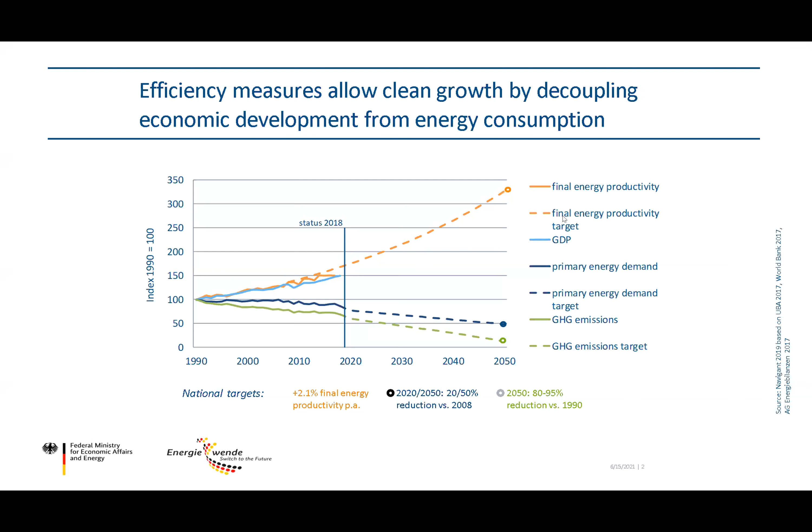I will just skip the next slide because it actually just shows what Germany plans with the energy transition, but I guess many of you already know the targets that Germany sets for the energy transition until 2050. So I would like to use this time to introduce you to the German Energy Solutions Initiative, which stands behind the project and is making this conference today possible, of course not without the help of our great partners, the German Chamber of Commerce in Peru, and our German partner eclareon here.

So a few words on the German Energy Solutions Initiative. Why are we doing all of this? We are facilitating business partnerships between German companies and companies abroad, based on a parliament decision that already dates back to 2002. For a very long time, we've been supporting small and medium-sized enterprises to distribute their smart and sustainable energy solutions. We also want to promote not only the German energy transition, but also climate protection. Everything is coordinated and financed by the German Federal Ministry for Economic Affairs and Energy.

On the next slide, I would like to show you what we offer for the Peruvian participants today. Of course, we offer information about German energy solutions, and we also offer the opportunity to get in contact with German companies through conferences like this one today, and the chance to network and expand the network. We also want to promote the know-how exchange, and we showcase flagship projects around the world through a couple of other events that we do.

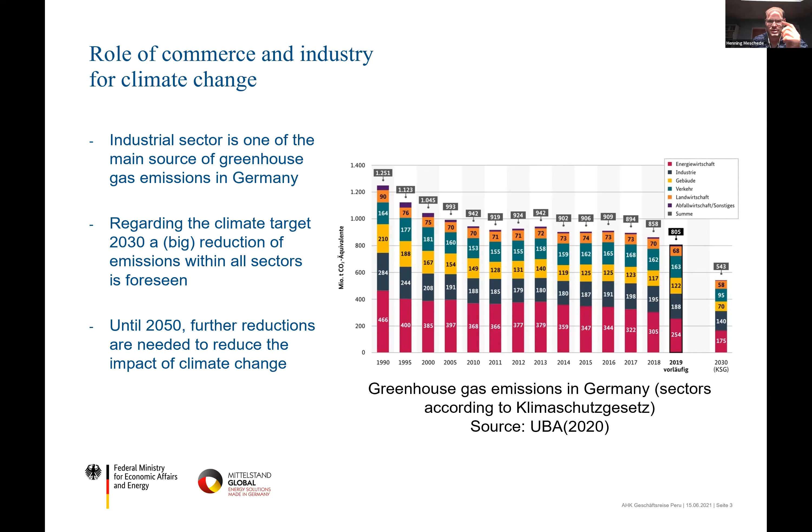Okay, I said we should think about the energy needs in our energy system. Here's what we see when we talk about industry. About 30% of our German end energy is used in the industry sector.

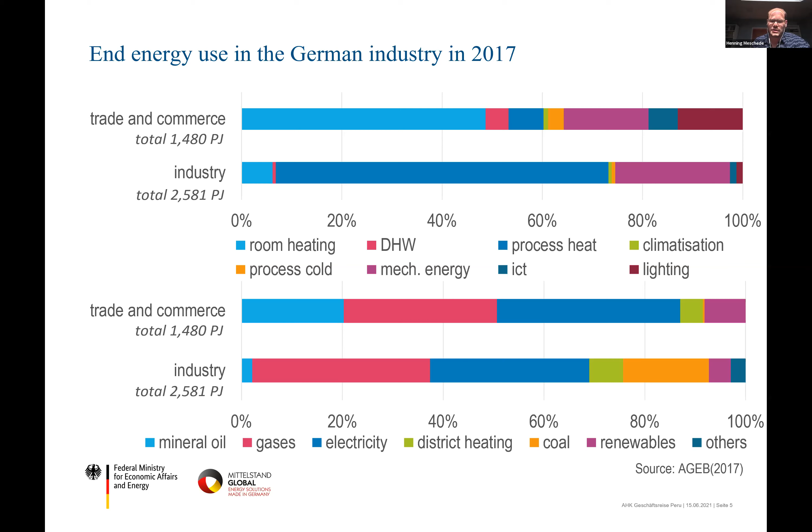On the bottom diagram, you see which energy carriers are used in the industry. We have a big amount of natural gas consumption, and of course a big amount of electricity. We also have some coal consumption, mainly due to the steel companies and steel processing industry. But here we see that we use fossil fuels, and we have to get rid of these fossil fuels and increase the share of renewable electricity and renewable energy.

We have these three fields to increase the energy efficiency and reduce our carbon emissions. First, what can we do on the energy needs side? We can think about our setting points or operation points, and consider if we can increase, for example, the temperature of the room to use less energy.

We can think about insulation, we can think about retrofitting. Then we have our technologies, in this case a chiller. Here we can think about efficient technologies like efficient pumps, efficient heaters, efficient chilling machines, and we can think about reuse of waste heat—what's won in our system that we can use more than once.

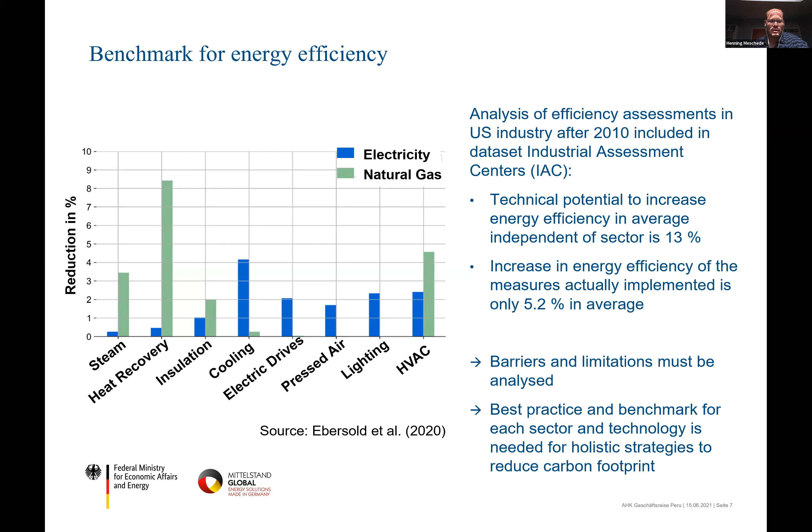Let's start with the HVAC system. Here we have a food processing factory. They produce some chocolate bars, and they have a hall where they have to satisfy or ensure a certain temperature within the whole hall of 18 degrees Celsius.

So 18 degrees Celsius for us humans is very cold, but for the product that was okay. And the idea was now to reduce the volume that has to be cooled down to 18 degrees so that we can reduce our energy demand for cooling our product.

You see here 3 options. The first is that we use some stratified air HVAC systems and only cool down the air at the ground or close to the product, and then we can use some in-housing. We have some encapsulation, you see that on the figure on the right. So we build an in-housing around the belt, and then we can reduce the volume that has to be cooled down to 18 degrees. Doing that allows us to save about 50% of the used energy within the system for the chocolate bar system.

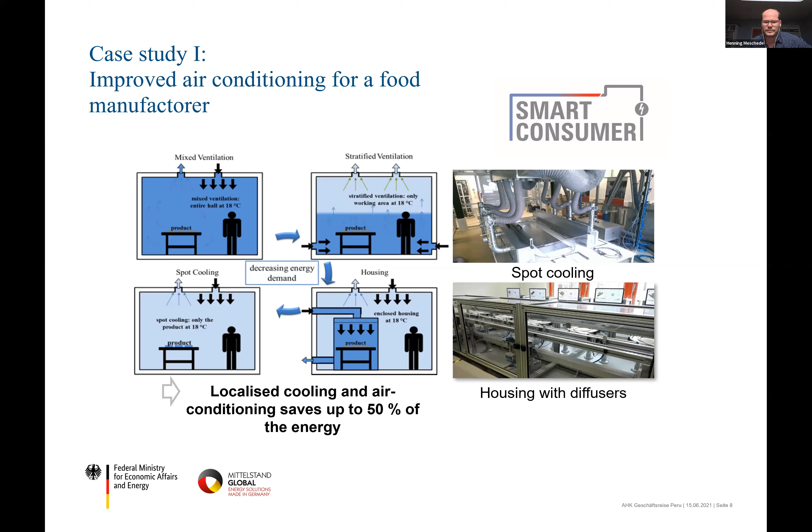Another possibility to increase the energy efficiency in the food processing industry and within the cooling of food was to optimize the operation of chilling machines. Here we have a factory, they produce sausage. They have to cool down their cold storage, and they have 2 chilling machines.

We analyze the chilling machines. We collect some data of the operation of the chilling machines, and then we use this collection and analysis of the data to implement a smarter control of the chilling machines.

Then in the third case study, I will tell you some options regarding waste heat utilization. Here we have a galvanic industry, so we are no longer in the food industry, but in the galvanic industry.

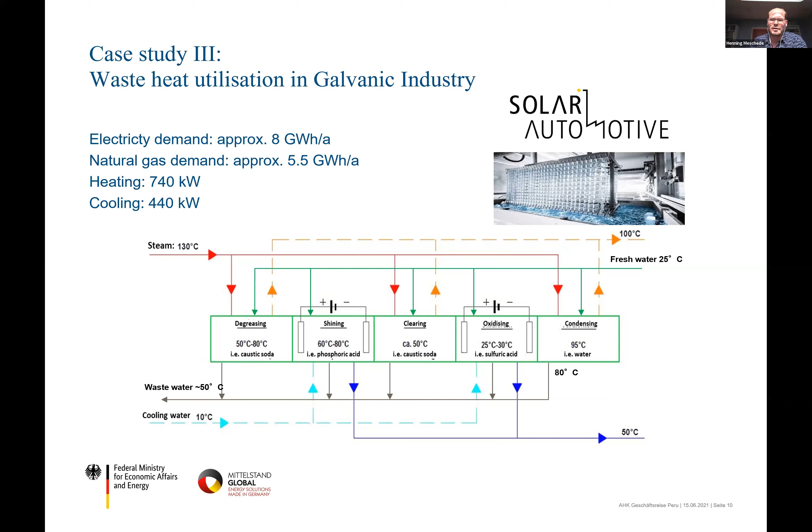But before we think about the energy supply, let's think about the waste heat utilization. We find some processes: we have wastewater with 50 degrees, we have the cooling water heated up to 50 degrees, and we have fresh water with 25 degrees. So we can use the heat that's in our wastewater and in our cooling water to preheat the fresh water and thereby save some energy for heating up our baths.

Then we have wastewater with a temperature of 80 degrees at the condensing bath, and we can use that too. So we can implement some ideas to reuse our waste heat and thereby reduce our heat demand. And that's what we have done.

We have to invest in a lot of heat exchangers, about 70,000 euros. But you see, we have a payback period of 1.8 years and a greenhouse gas saving of 186.5 tons CO2 equivalents per year, because now we can save about 712 megawatt hours of natural gas per year. That's what we have done with the waste heat utilization.

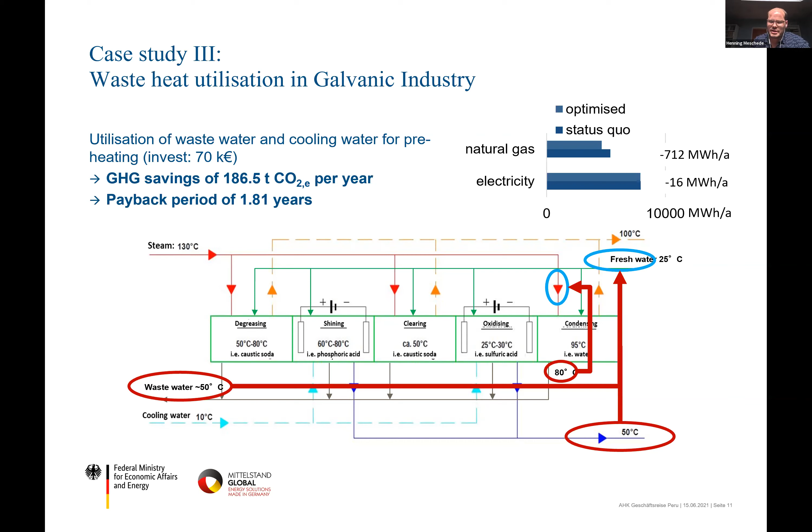And now, why start first with the waste heat utilization and then think about the energy supply? Here you see that in the status quo, before any waste heat utilization, we have a heating demand of 740 kilowatts and a cooling demand of 440 kilowatts.

Implementing this waste heat utilization, we can now reduce our heating and cooling load down to 400 kilowatts heating and 100 kilowatts cooling. That means every energy supply system can now be designed a little bit smaller.

Of course, we have some options for solar thermal process heating. We find payback periods between 7 and 8 years. But before thinking about the energy supply, we did this waste heat utilization to reduce the load.

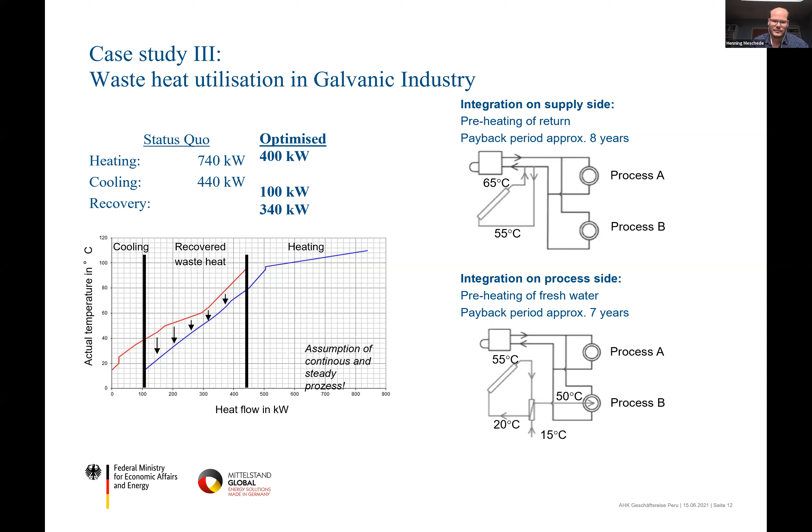Okay, let me summarize the idea. So what's a holistic smart energy system design? First, the design of any energy system starts with the analysis of the needs. We have to collect the data, analyze the data, and understand why we need energy. The industrial sector, as well as trade and commerce, have very high energy demand and cause a big part of greenhouse gas emissions.

In general, energy efficiency measures should start at reducing the energy needs, then reducing energy demand of processes and machines, and finally thinking about efficient ways of energy supply. Usually use this direction of implementation to design the best and most efficient energy system for your process and company.

And finally, of course, to design, evaluate, and operate energy concepts, data is indispensable. So we need collecting our energy demand. We need energy monitoring, and when we have that, we can do the best with the control strategies or with the design of any new energy system.

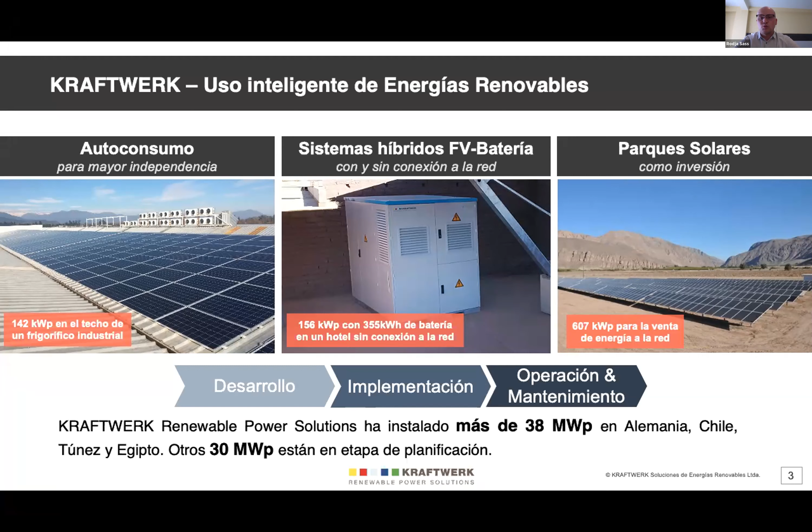En Perú, al día de hoy, no existe, en comparación tal vez con otros países como Alemania o también Chile, una legislación que permite la inyección de los excedentes de generación. Uno puede autogenerar la energía renovable en sus instalaciones, pero al día de hoy las inyecciones no están permitidas, y eso hace bastante importante un buen dimensionamiento del sistema fotovoltaico para evitar que hayan demasiadas pérdidas que no se aprovechan en el instante.

Siendo esto un tema importante al día de hoy en Perú, les quiero a continuación dar tal vez un simple ejemplo del comportamiento de una instalación fotovoltaica. En general esperamos que, como lo podemos ver a la derecha arriba, que un día no tan lejano exista esa posibilidad de inyectar y vender los excedentes de generación a la red, que ya está en trámite, pero todavía no sabemos cuándo exactamente se va a pasar esta ley.

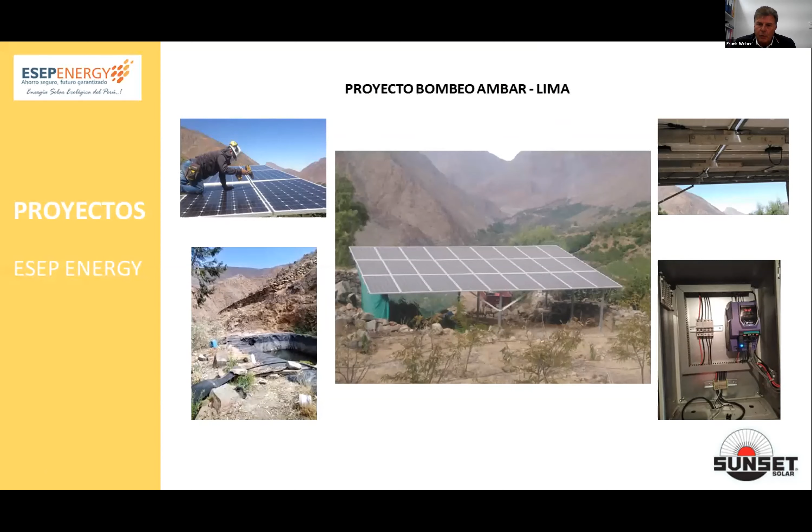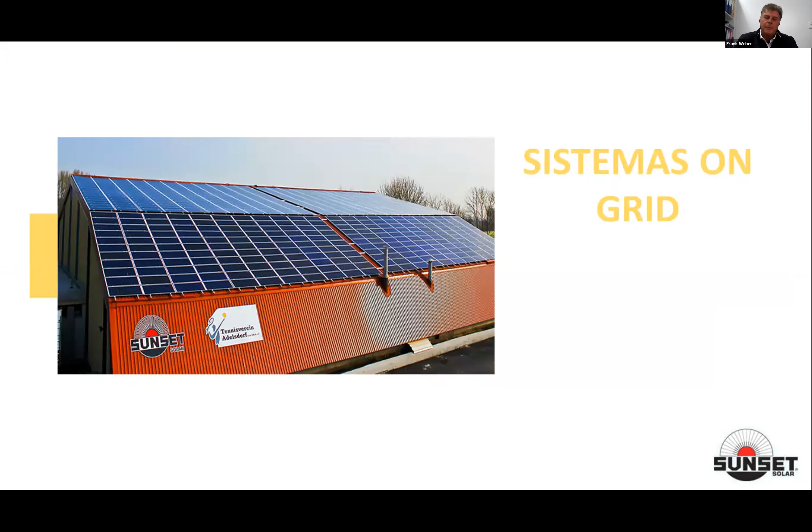El sistema on-grid, es decir, conectado a la red. Ya anteriormente el señor Sass ha explicado bastante bien este tema. Lamentablemente todavía no tenemos esta ley que nos permite inyectar a la red pública. Sin embargo, hay muchos clientes que tienen su consumo prácticamente durante el día solar, en este sentido.

Nuevamente se genera aquí la electricidad, se convierte en 230 voltios, 60 Hz en nuestro caso, y con un smart meter se puede evitar que el exceso se inyecte a la red. O también se puede acumular en baterías, esa es otra posibilidad.

Aquí unos ejemplos de instalaciones on-grid. Sunset instaló en el Senati, aquí en Lima, y en Arequipa, una instalación de 60 kilowatts de potencia. Esto es en parte financiado por Alemania también. Eso sirve para que los jóvenes que estudian en Senati estén ya en contacto con esta nueva tecnología y se puedan entrenar y aprender.

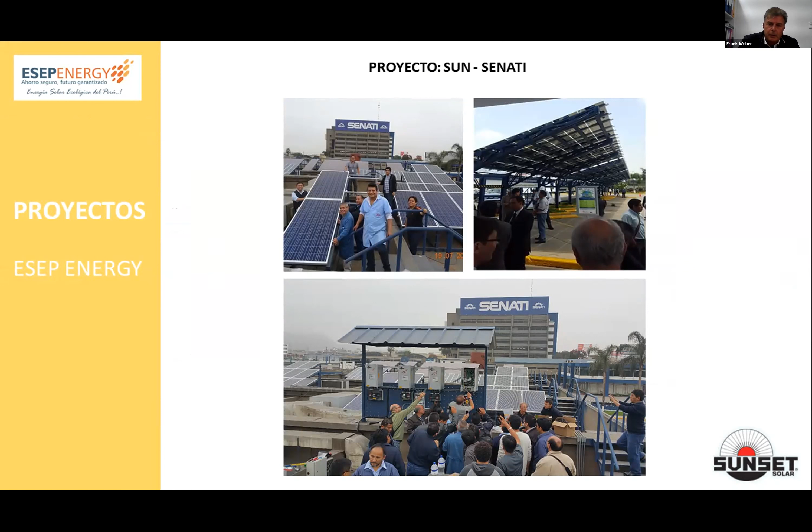Otro rubro interesante que todavía en el Perú no hay es el tema de fachadas. Se pueden cubrir las fachadas con paneles semitransparentes, que es atractivo arquitectónicamente, da un charme especial. También podemos poner techos semitransparentes, y además es un tema interesante porque genera energía junto con esta estructura arquitectónica.

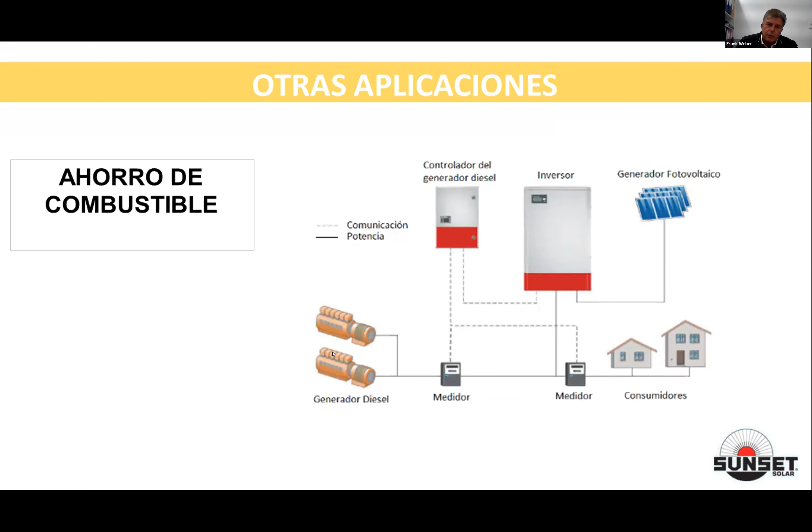El tema fuel saver es interesante para minería. Aquí, vía los paneles solares, generamos electricidad y reemplazamos parcialmente lo generado por los generadores diésel. Eso hace que las revoluciones de los generadores bajen y por ende consuman menos combustible diésel. Y la otra ventaja, también hay un ahorro en mantenimiento. Todo es controlado por este controlador que hace la comunicación entre el generador y el inversor.

Por ende, Sunset también tiene un programa completo para el calentamiento de agua de uso. También son sistemas normalmente híbridos que funcionan junto con gas o con electricidad. Nosotros todavía no estamos en este rubro aquí en el Perú, pero pensamos tal vez el próximo año iniciar en este rubro también.

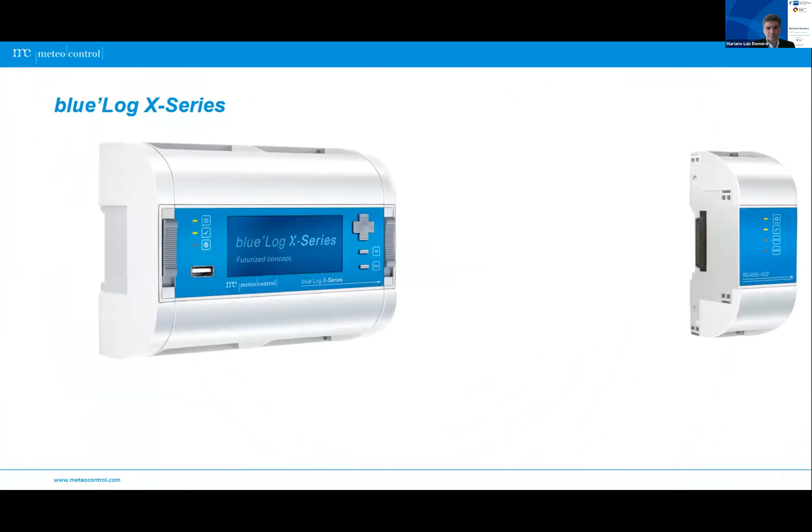Las soluciones que ofrecemos incluyen un conjunto de elementos de hardware y servicios en red. BlueLog es el nombre del data logger que comercializamos. Este data logger, solo o en conjunto con nuestra plataforma de almacenamiento de datos en la nube llamada VCOM, definen un sistema SCADA. SCADA es un sistema informático para la supervisión y control de procesos que además recoge y analiza datos en tiempo real. El BlueLog, que pueden ver en pantalla, es un data logger modular que puede monitorear hasta 100 dispositivos o controlar hasta 30 dispositivos.

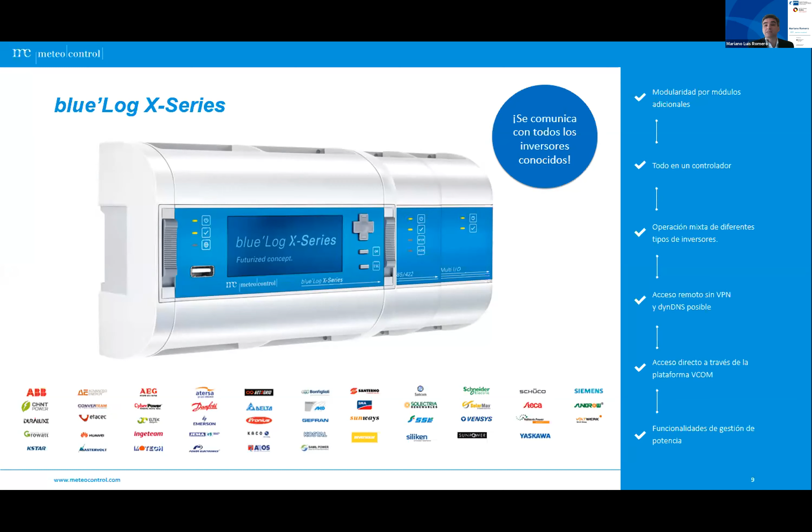Hablando estrictamente de soluciones para control, y acá podemos pensar, por ejemplo, en plantas con autoconsumo, la función conocida como Zero Feeding, mencionaríamos nuestro controlador de planta abreviado como PPC. PPC permite el control integral de potencia activa y reactiva, así como tensión en el punto de conexión de red. Es una solución que cumple con normas de red eléctrica internacionales. Para esto, Meteocontrol cuenta con una división que analiza la normativa de cada mercado en el que estamos presentes.

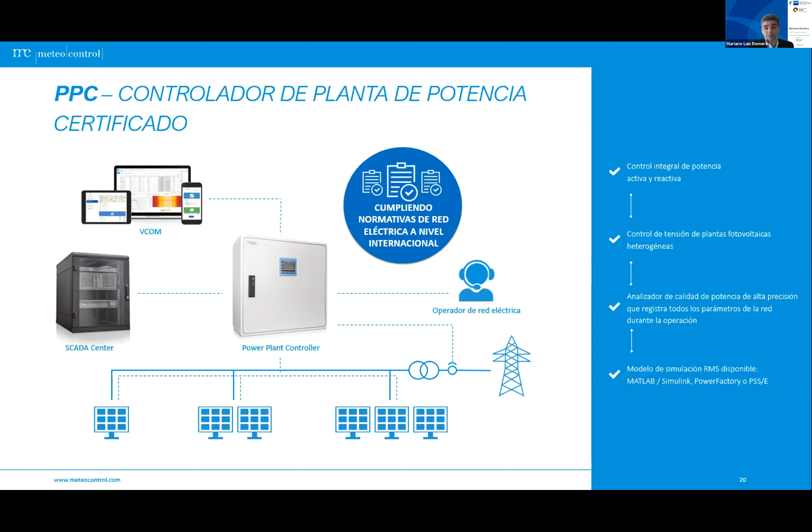El corazón del PPC es el BlueLog XC. El modelo XC, la C viene de control, permite regular potencia activa y reactiva en el punto de conexión. Para garantizar una regulación rápida y estable, un analizador de redes de alta precisión registra todos los parámetros de red. La interfaz gráfica de usuario del BlueLog facilita la puesta en servicio, por lo que no se necesita contar con conocimientos de programación.

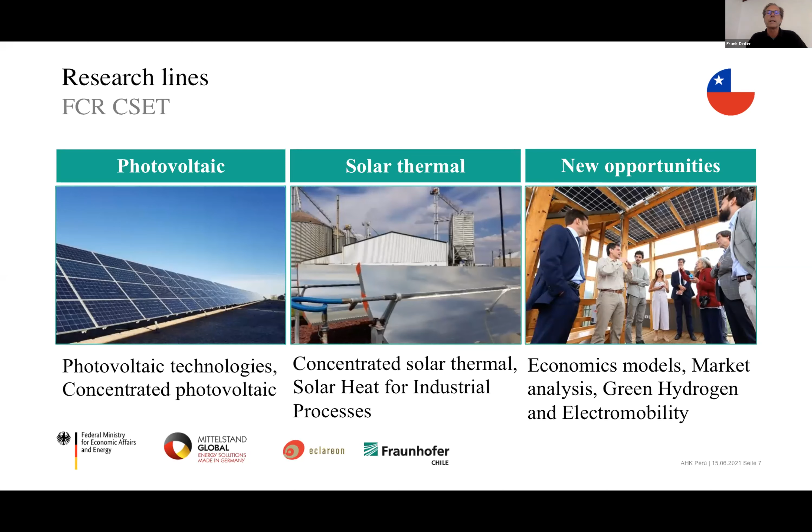Our research lines are photovoltaics, solar thermal, and we are also working in economic models, market analysis, green hydrogen, and electromobility here in LATAM. Our vision is really to be a referred organization in Chile and Latin America. And our mission is really to connect science and technology realized in Chile or LATAM and Germany. And we do a lot of technology transfer directly from our institutes in Germany.

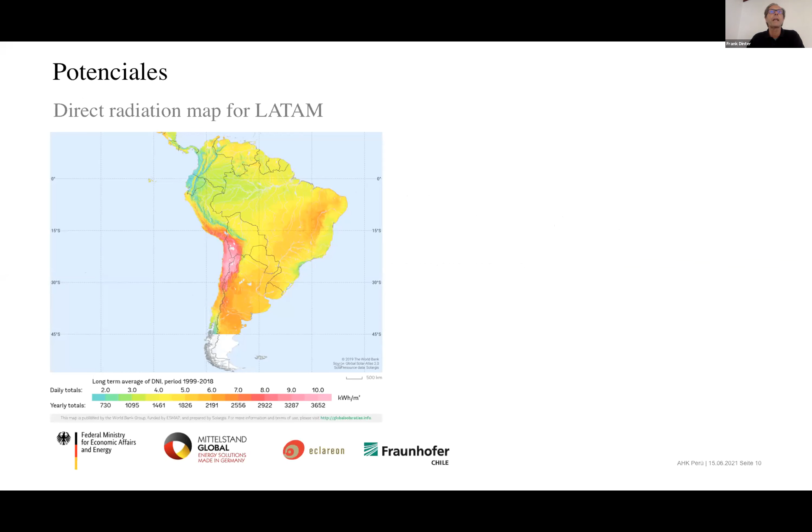So coming to the main topic of today, solar energy for electricity production is one of them. And why are we looking into this? You see a map here of direct radiation, and you see really the hotspots in the area of South Peru, north of Chile, and the south of Bolivia. Why is it like this? Because it's high altitude, there is totally clean air, and there's low humidity. And with this, the radiation is really the best you can get all over the world.

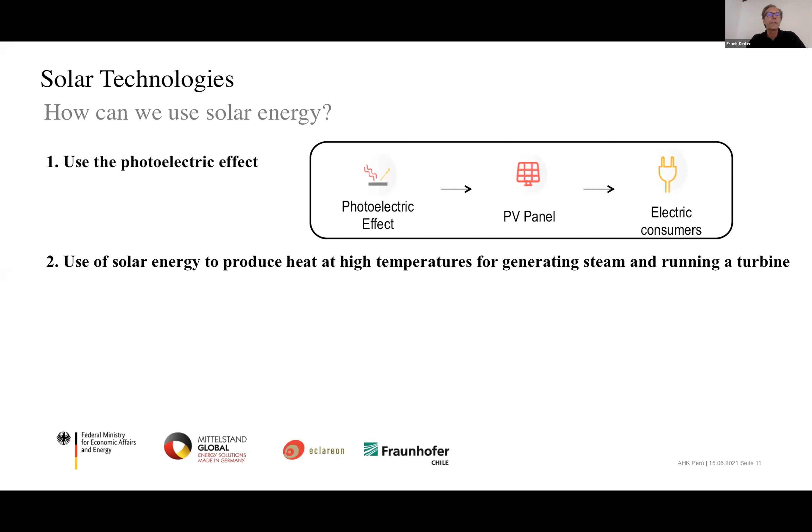So how can we use this solar energy? There are two things to do so. The photoelectric effect, and we heard already how this works, and two companies already presented their products on this. And there is the other use for solar energy, to produce high temperatures by concentrating the energy. There are different possibilities to concentrate: you have the point focus systems with parabolic dish and a central receiver system, or you have the line focused systems where you have the cilindros parabolicos, so the parabolic troughs, or the Fresnel systems.

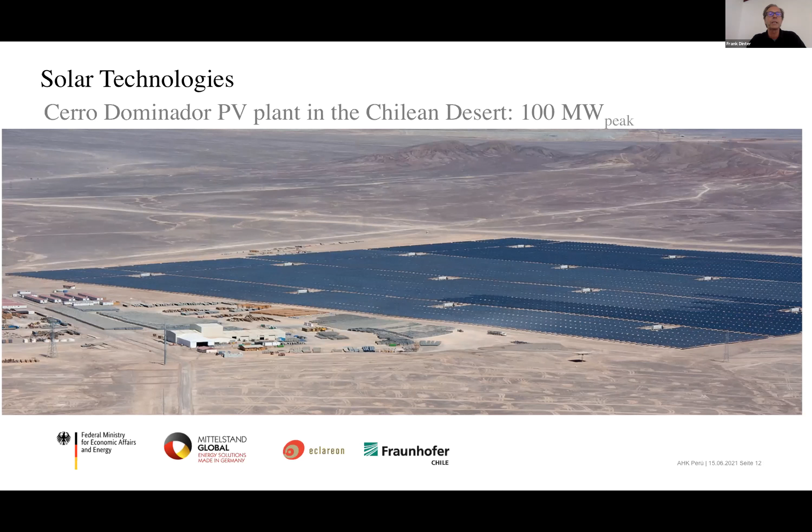Well, first, the PV plants, you probably have seen many of them. This here is an example, 100 megawatt peak. There are one-axis tracking PV panels. The land use is about 300 hectares, and this plant is installed in the Atacama Desert near a mine which is called Maria Elena.

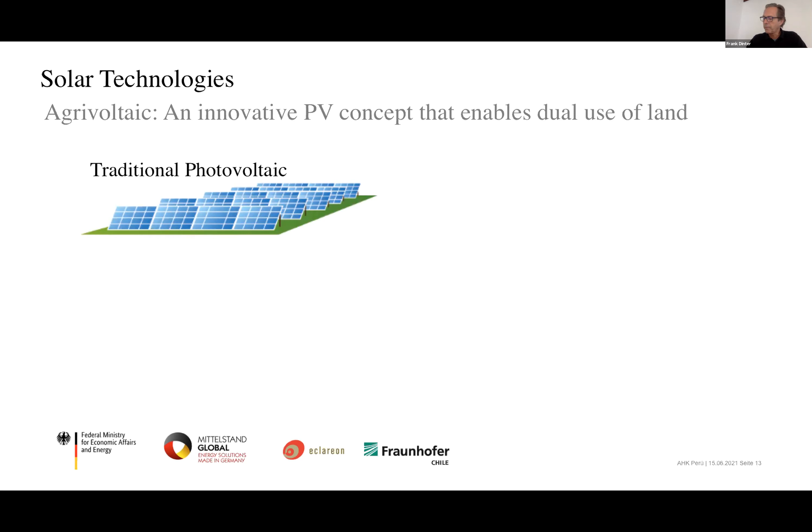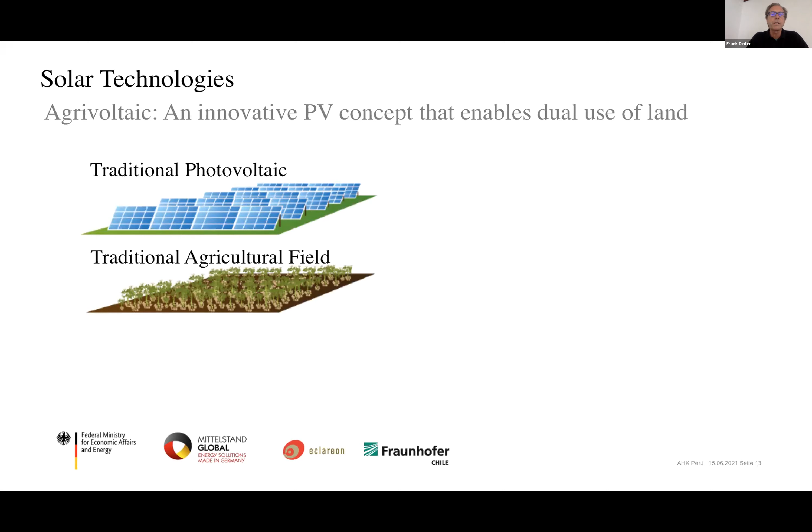There's also another innovative possibility to use PV: traditional photovoltaic sometimes competes with agriculture fields. You can use these together by installing agrivoltaic panels, maybe 4 meters high, above the agriculture field. You don't have 100% production of photovoltaics, because then you would shade the agriculture fields too much. But there are some plants which don't like too much sun, so with some shading you can have PV on top and also get better results in your crops.

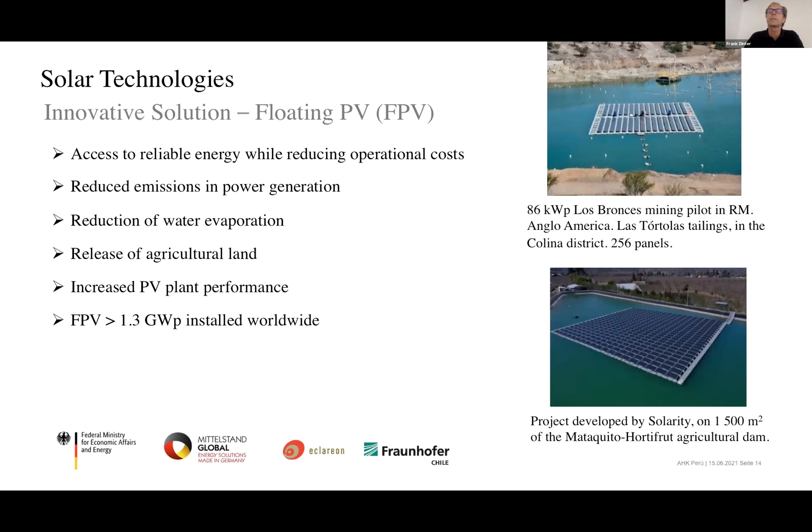There's another nice innovative solution we are working on in Chile at the moment, called floating PV. You can use dams and cover them with floating photovoltaic panels. With this, you have the possibility to reduce water evaporation, and you also don't compete with agriculture land.

Then we come to solar thermal, or concentrating solar power systems, where you can really produce electricity 24 hours a day, 7 days a week, because of the integrated solar thermal storage system. These CSP plants need high direct radiation, flat ground because they are quite big, and a connection to a medium or high voltage grid. They also need access to water, similar to PV plants, because you have to clean the panels somehow.

You need additional water for your vapor cycle, but this is much less than for cleaning. About 1,000 workers work on site during the construction phase, so it's generating a lot of jobs. After construction, you need suppliers and other services at these plants. The construction lasts about 2 years.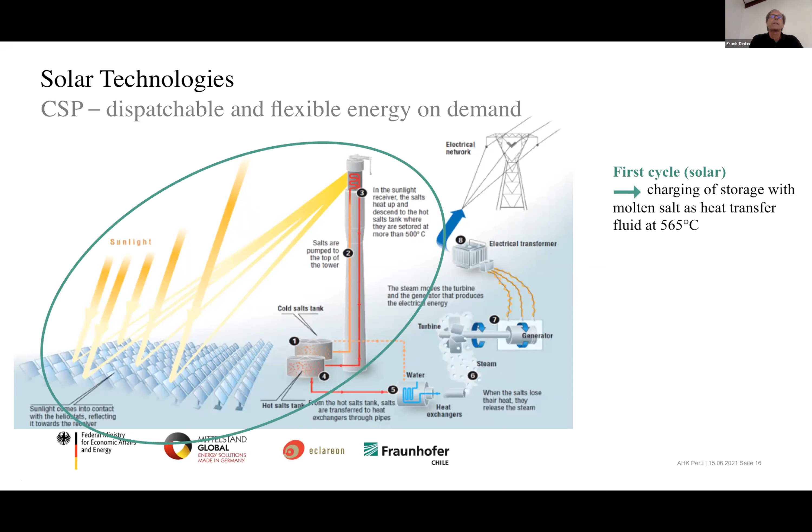I just want to explain how this technology works. You can see here a solar field on the left. The sun is reflected by the heliostats, which are very big mirrors, and they concentrate the sunlight on a receiver on top of the tower. In the middle of the slide there are two tanks, a cold tank and a hot tank. The cold liquid is pumped up to the receiver, heated up by sun radiation, and then goes down to the hot tank. I call this the first cycle, the solar cycle, how to collect the solar energy.

Then for discharging you have the second cycle: you get hot liquid from the hot tank to produce vapor in a steam generator, and run a turbine to produce electricity. Whenever you have heat or hot liquid in the hot tank, this liquid is a molten salt, which is used in the heat exchangers. Whenever you have this liquid in the hot tank, you can produce electricity on demand whenever you need it.

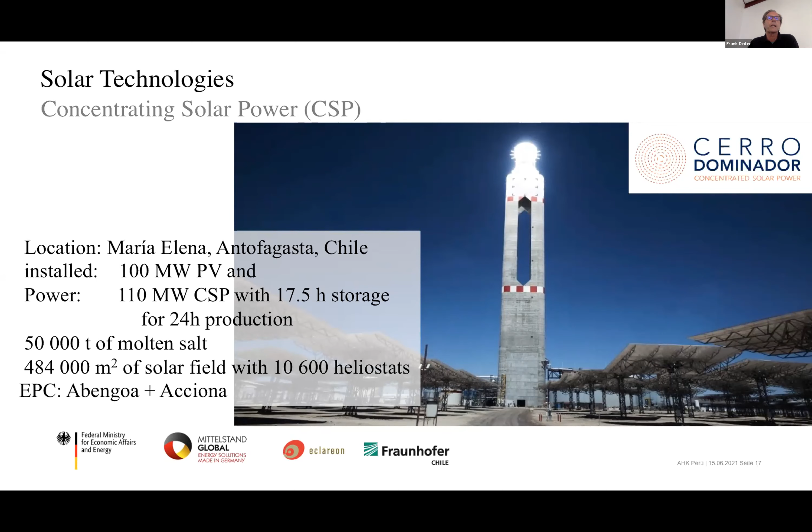One example: the first Latin American CSP plant was inaugurated last week, installed near Maria Elena in the Antofagasta region, in the Atacama Desert. It has 110 megawatts, it's a tower design, and has an integrated solar thermal storage of 17.5 hours, really built for 24-hour production. About 50,000 tons of molten salt are installed, and the solar field is almost 500,000 square meters. Each heliostat has 140 square meters, and 10,600 heliostats are installed. This plant is now inaugurated and producing electricity here in Chile.

Now we come to the last point of my presentation: solar energy for industrial processes. We've heard a few things already, but I want to tell you what we are doing especially in this direction, and what examples we can present to you.

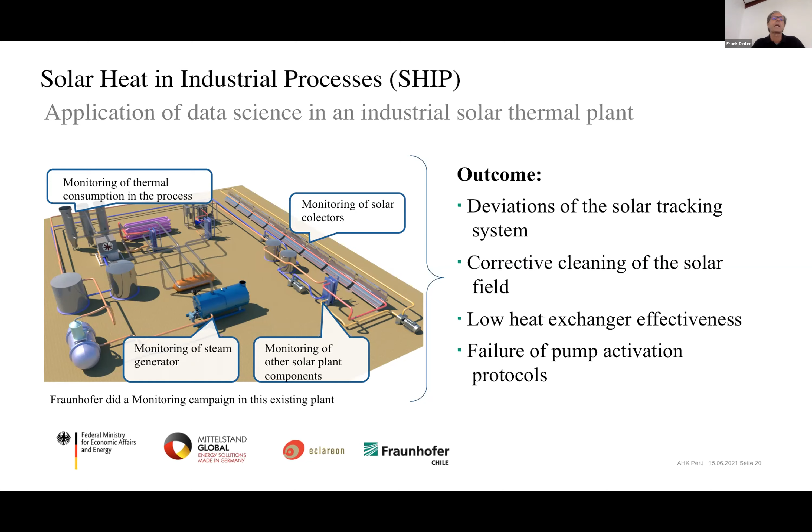And with all this, now the system is running much better than before. Also, in breweries, you can use very nicely solar thermal energy.

This brewery in the Valle del Elqui, where the sun is shining quite nicely, wanted to go 100% renewable and brew a beer which is 100% produced by renewable energy. They installed first some PV on their roofs and additional PV in front of it, but with beer production, you also need a lot of heat.

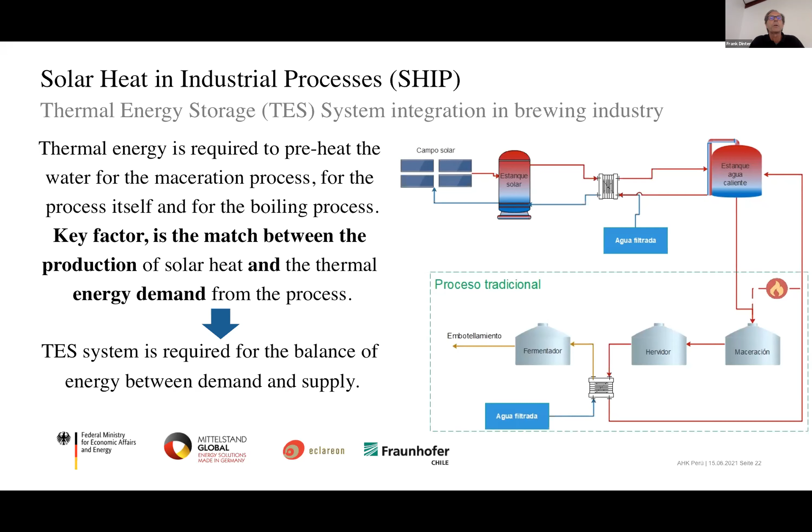Key factor is that you have energy available around the clock, so you collect the solar energy during daytime, put it into the storage, and use as much as you need from the storage. You just have to design the plant big enough that you can feed your process not only during daytime, but also during nighttime.

There's another example I want to look at, which is electrowinning, in the copper mining industry. You can also use the solar field with a storage system, and then go into the process for the electrowinning. And because of the different liquids you are using in the process, you always need heat exchangers.

This plant is very big, Pampa Elvira from Codelco, but it was built to save fuel. Before, they just used diesel to heat up the water for the electrowinning process, and now they have a solar fraction, meaning the solar part of the system is more than 50%.

Because they are producing 24/7, if you can save 50% of the diesel in such a big plant, they can save 20,000 liters of diesel per day, which means 250 fewer trucks going up to the mine every year. This is really something very, very positive.

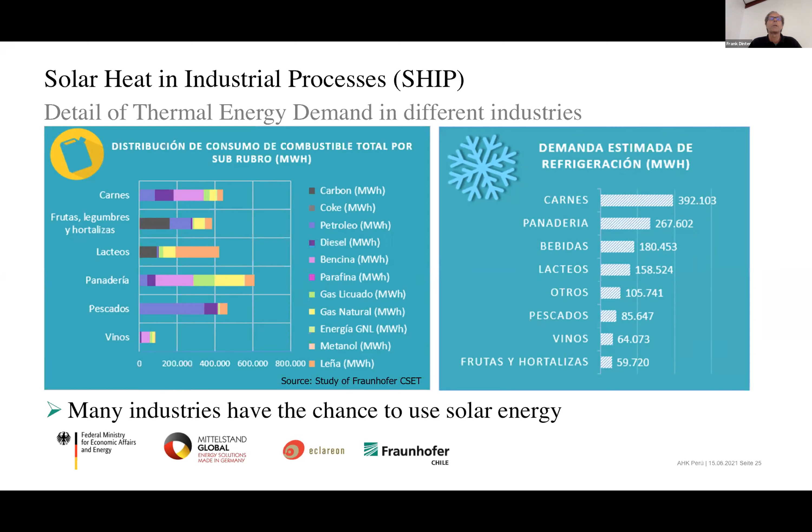And so I come to my last slide. I just showed you that solar energy really can do a lot where the sun is shining: PV during daytime, CSP with storage combined with PV for 24-hour production. Solar thermal applications can be used in many industries for heating and also for cooling.

The benefits are CO2 emission reduction and also cost reduction for solar energy, because PV is the cheapest electricity production at hand today. It will also work quite well in Peru. Solar thermal applications for industry processes have payback times of less than 5 years, and some even less than 3 years. We are keen to support you in going solar.

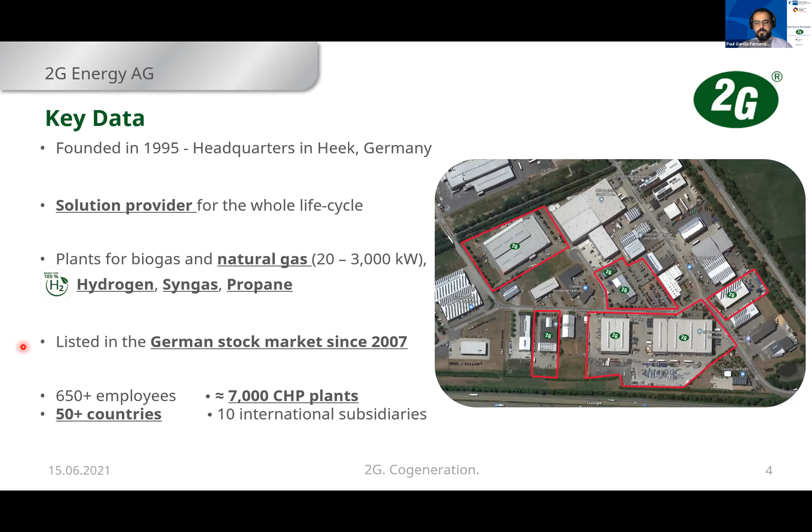Somos una empresa pública y desde nuestra fundación hemos comisionado más de 7,000 plantas en más de 50 países, lo cual nos da una amplia experiencia.

La empresa se ha enfocado mucho en la investigación y desarrollo de productos, no solamente los motores, y algunos de los hitos que hemos logrado a través de nuestro equipo de investigación y desarrollo es el intervalo extendido de servicio, que va hasta 4,000 horas, la reducción en el consumo de aceite, una confiabilidad inigualable de más de 8,300 horas por año bajo un régimen de operación continua, el uso de herramientas de realidad aumentada para dar soporte a nuestros partners en las actividades de servicio.

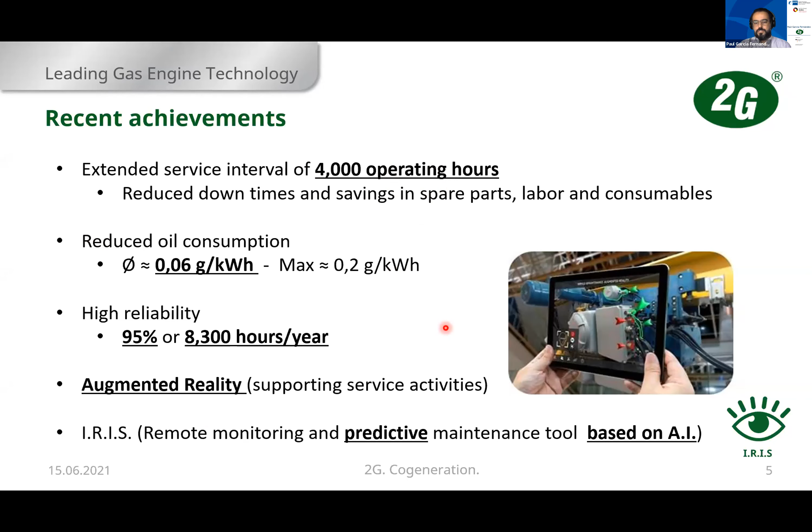Así como herramientas basadas en inteligencia artificial para tener un mantenimiento predictivo, que a su vez es lo que nos ha llevado a esta confiabilidad tan alta de intervalos de servicio y de horas de operación. Por supuesto, la eficiencia eléctrica es un tema que trabajamos todos los días.

Nuestro portafolio de productos es muy variado. En términos de potencia eléctrica, vamos desde los 20 kilowatts hasta los 3,000 kilowatts para aplicaciones en 60 Hz, con variedad de combustibles, como les decía, y tenemos distintas familias que se enfocan en distintos tipos de soluciones.

Por ejemplo, equipos especializados en biogás, la familia Aura para bajas emisiones de NOx y de CO, los agenitor con alta eficiencia y la confiabilidad. Al final, vemos que los rangos de potencia entre las familias se empalman, y eso es precisamente para poder encontrar la solución adecuada en función de las necesidades del cliente.

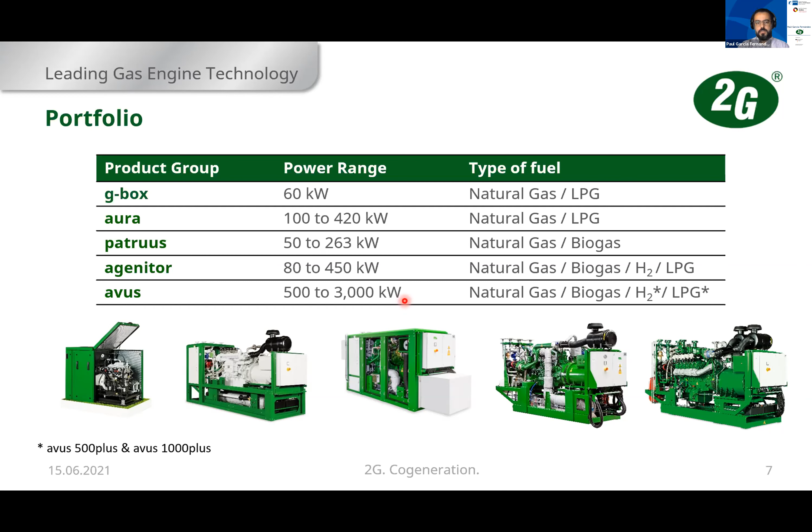Las soluciones van mucho más allá del motor. Podemos entregar las plantas de cogeneración con encabinados acústicos para instalaciones en el interior o contenerizados como plantas de generación para exterior. Tenemos soluciones para climas extremos y altitudes de más de 2000 metros, que sería un caso también muy interesante para el Perú.

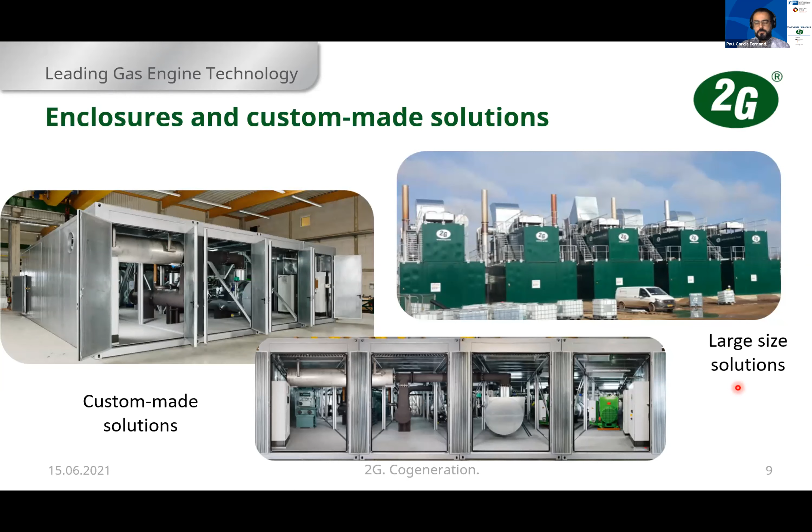Tenemos soluciones hechas a la medida y, por supuesto, soluciones más allá de industriales, soluciones para plantas de generación conectadas a la red. Tenemos equipos periféricos adicionales a las plantas, por ejemplo, sistemas de mezclado de combustibles, sistemas para tratamiento de biogás y una variedad de sistemas de recuperación y distribución de calor, que puede ser vapor, aceite térmico, agua caliente, switches hidráulicos.

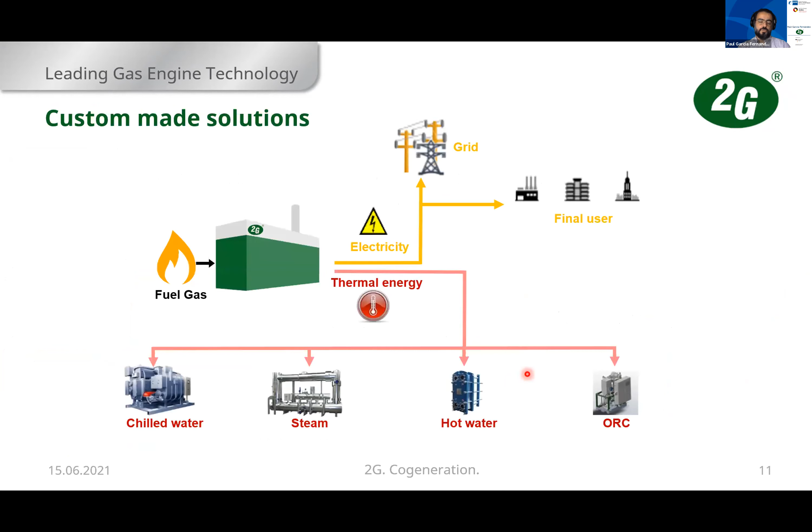Entonces, cuando ponemos todo esto junto, la parte de recuperación de calor, las especificaciones eléctricas, la interconexión a la red, el tipo de encabinado, el tipo de combustible, es que nosotros realmente nos consideramos un proveedor de soluciones.

Además de las soluciones de hardware, tenemos una serie de soluciones de software que las englobamos en 12 aplicaciones, que van desde un monitoreo y control remoto de las unidades, que puede ser desde una PC o desde un teléfono móvil, hasta un catálogo de partes vinculado a una tienda en línea para actividades de servicio.

Tenemos nuestro propio sistema de control, lo cual nos permite modificarlo de acuerdo a las necesidades del cliente, integrando todos los componentes de su planta, sistemas de recuperación de calor como agua caliente o vapor, sistemas de lubricación, aire de ventilación. También tenemos un sistema de control maestro que nos da una flexibilidad virtualmente ilimitada.

Cuando hablamos de operación, podemos operar múltiples unidades conectadas o no a la red, limitando la importación o exportación de energía de la red, operaciones en cascada, control de equipos externos como generadores diésel, incluso operación como Virtual Power Plant en paralelo con plantas fotovoltaicas y eólicas, que es algo que hemos hecho con bastante éxito acá en Alemania.

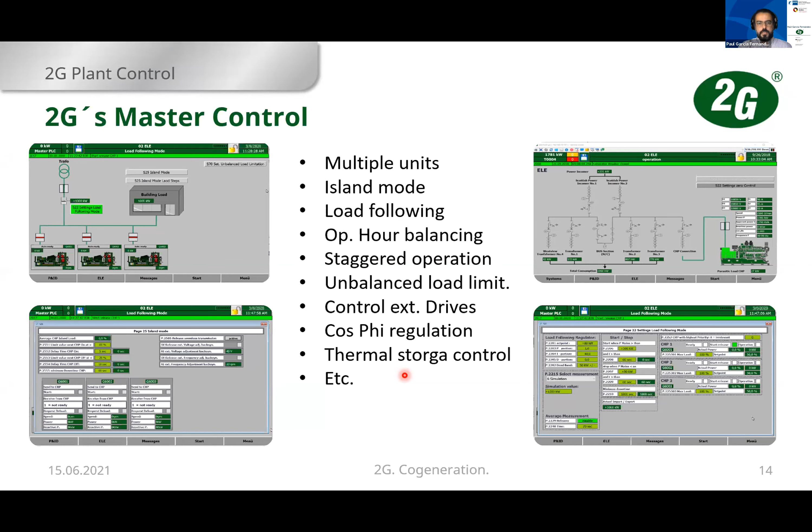Por último, tenemos, como lo mencioné al inicio, una tecnología que lanzamos recientemente, que es la cogeneración capaz de operar 100% con hidrógeno, lo cual nos permite acoplar a muchos más sectores de la economía a esta economía incipiente del hidrógeno. Dos de las principales características son que, si bien puede trabajar con 100% hidrógeno, es posible mezclar el hidrógeno con gas natural o biogás de acuerdo a la disponibilidad de los combustibles. Por otro lado, los equipos que hoy están operando en campo con gas natural o con biogás pueden ser convertidos a operación con hidrógeno a través de un kit de conversión que tenemos, lo cual nos permite comenzar a aprovechar los beneficios de la cogeneración hoy en día con combustibles tradicionales y migrar a combustibles alternativos o verdes cuando estén disponibles en términos físicos y económicos, en este caso en Perú.

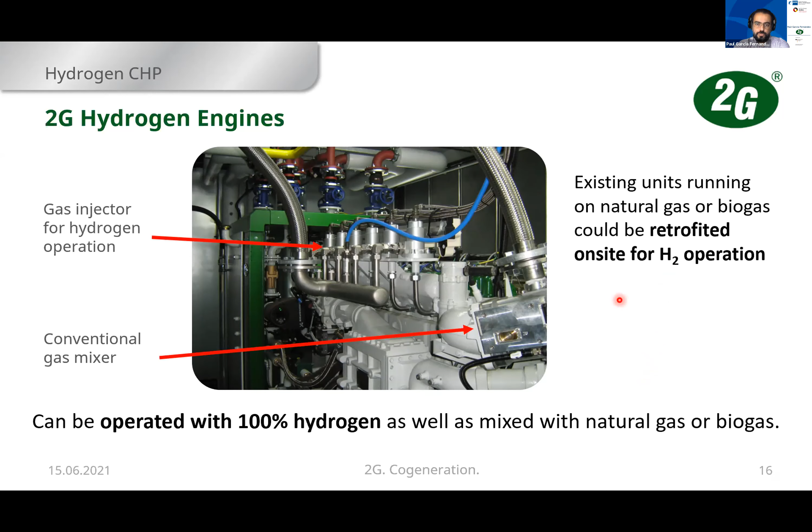Oh, okay. So please let me know if you can see my screen. Yes, okay, I can see it. If you please could go to full screen mode. I think it's not letting me. Or just use F11. Okay, I think it's not letting me to put the full screen mode. So, well, just raise the zoom factor and we go on with this. Okay. So maybe we can do it like this, because I'm not able to do the full screen mode. I just have the PDF version of the presentation. Okay, so just let's go on with this. Okay. If you can just raise the zoom a little bit, so that it's only at 55%. Okay, now I have overcome my problems here, so I could show you the presentation. Perfect. So we get back to your computer. Okay, that's much better. Okay.

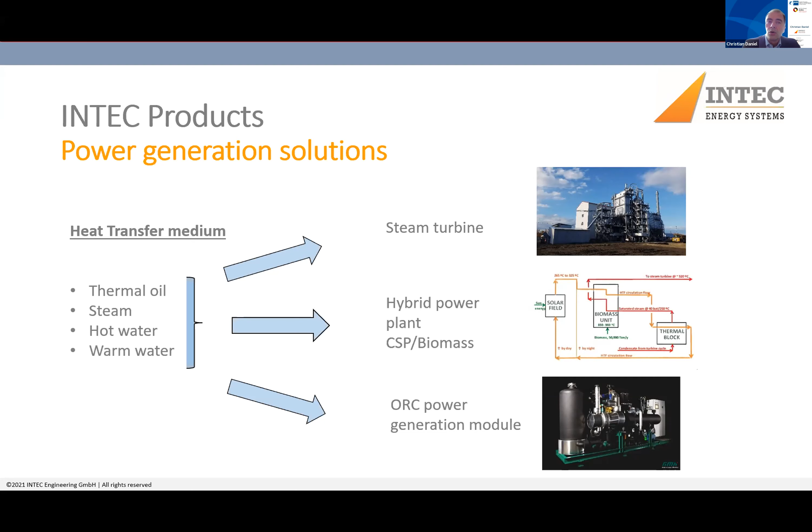Beyond this, of course, we see the renewable power generation solutions from biomass. Here we are working with different biomass types. It can be sewage sludge. It can also be - an actual project now from Turkey - where we are using livestock excreta, so let's say chicken litter. This can be burnt nicely, or we can use standard biomass from wood chips, bark, sawdust from production processes. We can use building material waste from there, or going into the agricultural sector. We use also general biomass and agricultural waste - rice husk, coffee pods, palm kernel shell, cotton stalks, sunflower seeds. All this can be used nicely to generate the heat.

And finally, we have the application which is getting more and more important now worldwide - to incinerate the municipal waste, plastics from there, RDF, or also a combination of all these. When you get all the waste, including the organic biomass, this can all be incinerated completely, and then you turn this into electricity.

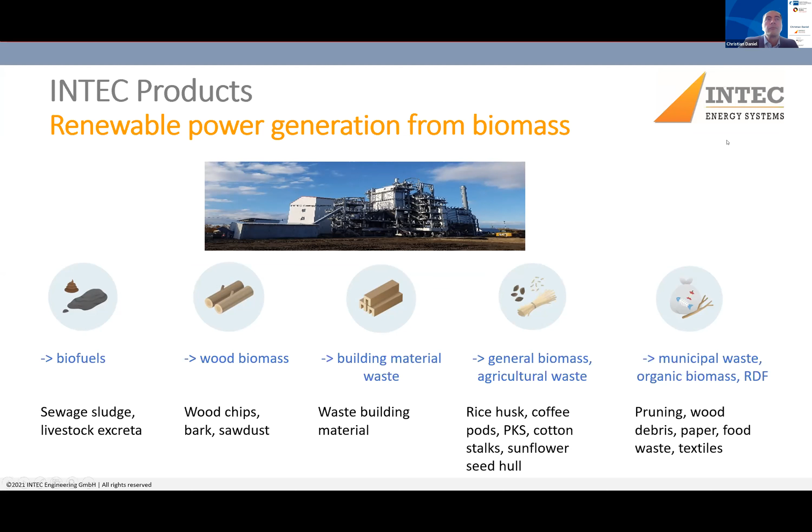And the final section which we have is the sewage sludge drying and incineration. In Europe, there is new legislation which is not allowing anymore to distribute the sludge to the fields because it's contaminating the ground and the water, and this must be inertized. And here we are offering complete solutions to dry the sludge, either by thermal oil or by steam. And further, when the sludge is dried and ready to be burned, we are offering the complete incineration solution and the heat recovery to that, either to heat up again the drying process or to turn this heat into electrical power or hot water for different applications in the adjacent cities.

The time is, of course, short, and we have many different products. I just wanted to give you an overview about what we are doing, and we are going to see how we apply with the customers.

Our approach is to help our customers by providing a complete solution from one hand, to develop their requirements jointly. If they have a requirement for the manufacturing process, we can offer the necessary consultation and equipment. Manufacturing of key components is done here in Germany at our workshop, while we also offer the customer local manufacturing of components according to our manufacturing drawings. Following this, we also send our team of specialized engineers to supervise the installation and startup.

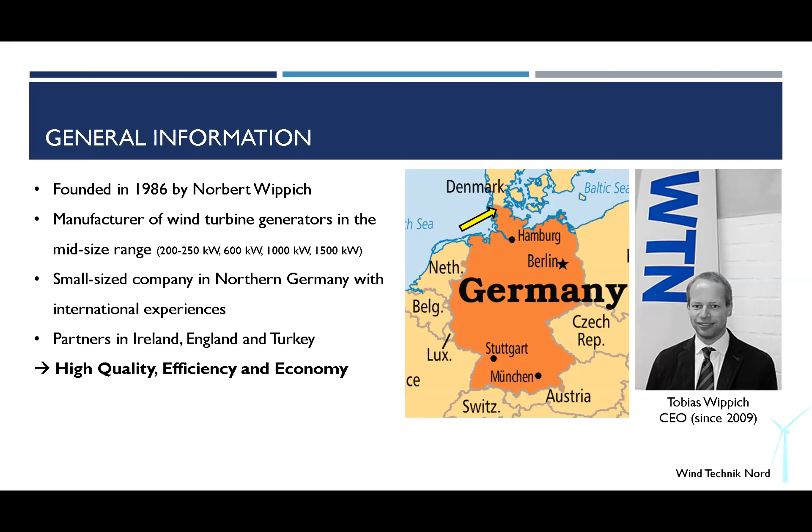Page 4. We are producing wind turbines since 1986, and the first turbines we had in the field were our WTN 200, which we can still offer refurbished. Some turbines have been running for more than 30 years, and our newer product is the WTN 250. Both turbines can be transported in usual sea containers, 40 feet open top sea containers, depending on which tower you would like to take. We have 3 tower versions which can be used for transport in containers.

Please, page 5. So we do everything with the turbine, from manufacturing over transport, installation and commissioning. And of course we can offer service and maintenance, but for Peru we would like to train some local people, and we will also offer remote monitoring via our SCADA system 24/7.

Page 6, please. As I told before, turbines are very reliable, they just work, and that's very important. They are not as big as a megawatt turbine, so you can reach places with these turbines where you cannot go with bigger turbines. And we need only 1 day, weather permitted, for erection of the turbine.

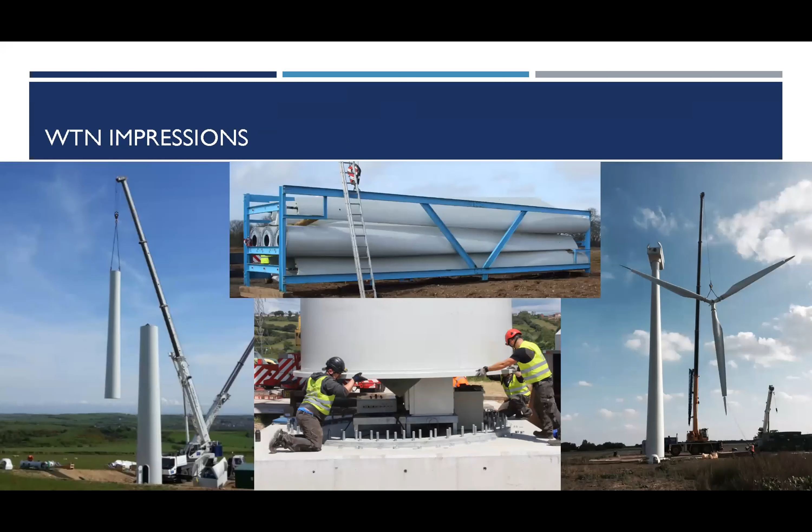Okay, please get in touch with us, and the AHK will provide you with the contact details.

Okay, thanks for. Yeah, thank you very much, Mr. Wippich.

Despite the problems, we managed to address this message. I will just make a short resume in Spanish.

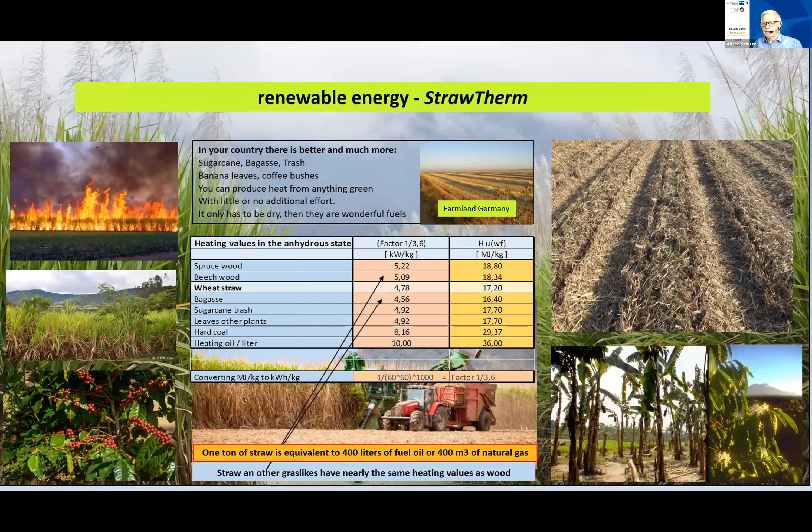This later on you can get this also. But the other thing is, this looks very, very nice. The other thing is, if you burn it in a normal boiler, you get a lot of troubles.

Inside the boilers, the ash melts to slag, and on the walls of the boilers, roof and everything, the slag is hanging, and you can't remove it by anything. It's not possible to remove it in a short time. The boiler doesn't work.

It's only possible with a special boiler, the StrawTherm boiler. I'll show you one picture. This is the ash, not like the slag, black. This is ash, white to gray, like a powder. This is the best ash you can get.

From the exhaust, there's no black smoke. It's only the water inside the pot or inside the burning material you put in. After a short distance, you see nothing more. This is only the 15% moisture of the straw you see.

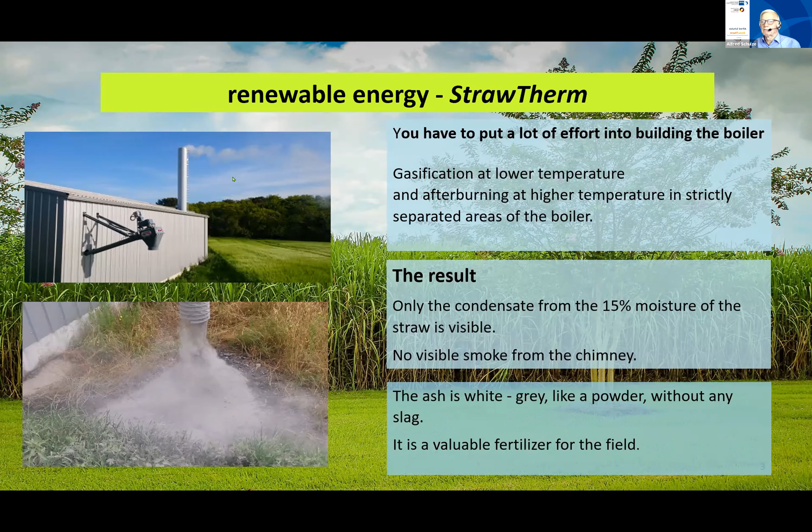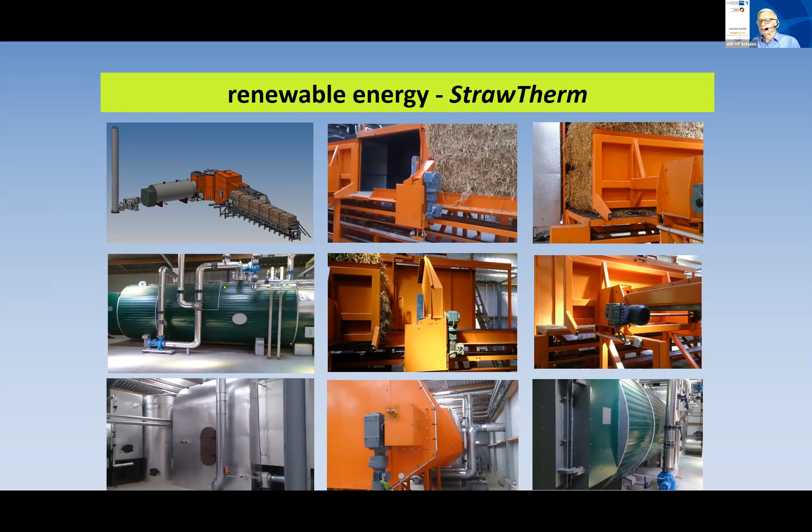This is a picture of the steam generator, also heating by straw. Here's also a picture of the ash, like a powder. If you open the drawer, it's very, very clean, only a little bit, but it's nothing bad inside.

You can use this to make hot water, steam, hot gas, for drying berries, vegetables, grains, fruits, heating or cooling networks. It's good for the canning industry, slaughterhouses, food storing, residential hotels, offices, and so on.

Dye works, laundries, pellet production - if you make pellets, you need a lot of steam. You can also make electricity. In the past, the electricity efficiency was only about 11% of the heat value.

But now with new turbines, micro turbines, you can get electricity efficiency of about 21%. And financing is possible with KfW.

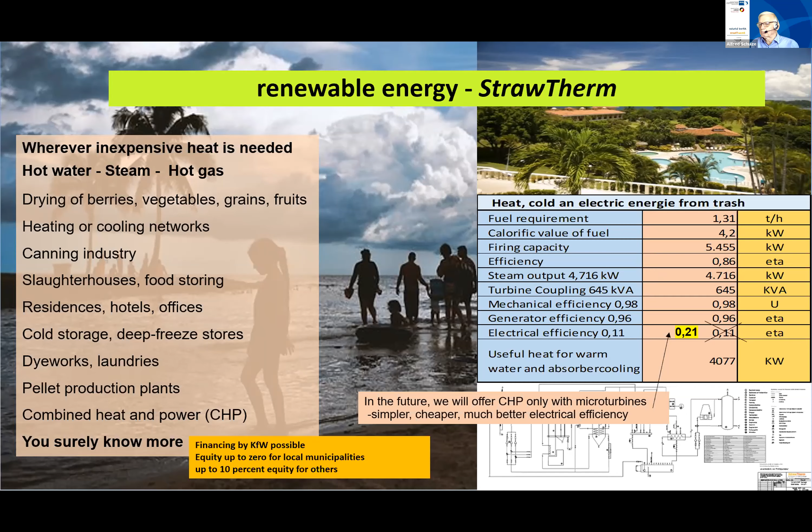KfW is a bank of the German government, and they have a very interesting financing system. It's only about 10% equity for private persons, and for villages and communes, the own capital equity required is zero. It's indeed very, very good.

Yes, that's nearly everything. If you are interested, you can make an appointment with me, and we'll look later on at what we can do together. Thank you very much.